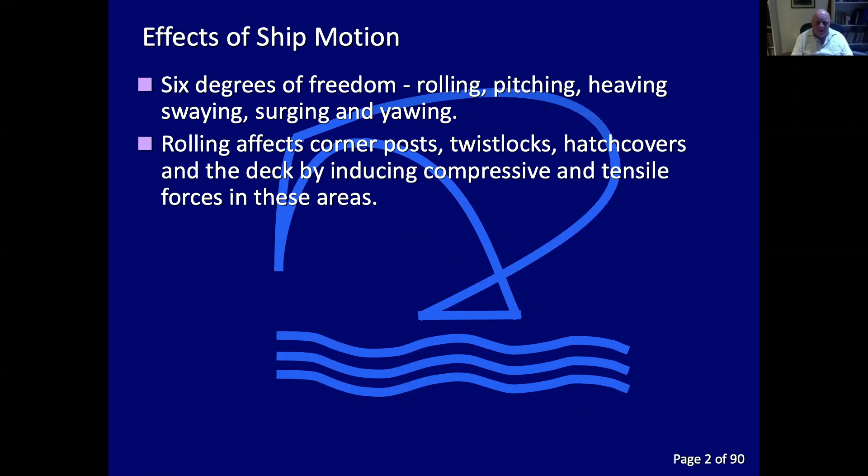Container ships, like all ships, go through ship motions. We have 6 degrees of freedom: rolling, pitching, heaving, swaying, surging, and yawing. All of those have an effect on containers on container ships. Rolling affects container corner posts, twistlocks, hatch covers, and the deck by inducing compressive and tensile forces in those areas. Pitching causes longitudinal racking in the container sides, which may be high at the bow and stern. Heaving is induced by pitching, increasing compressive and tensile forces on corner posts and twistlocks.

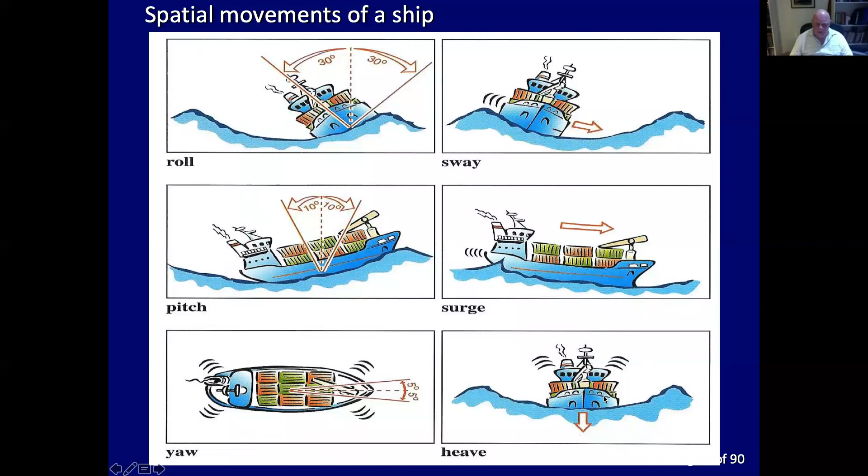So there are 6 motions, you've probably seen that diagram before. We've got rolling, sway - sideways movement if you like, pitch, surge - acceleration and deceleration along the longitudinal direction, yaw - twisting and turning from side to side, and heave - up and down.

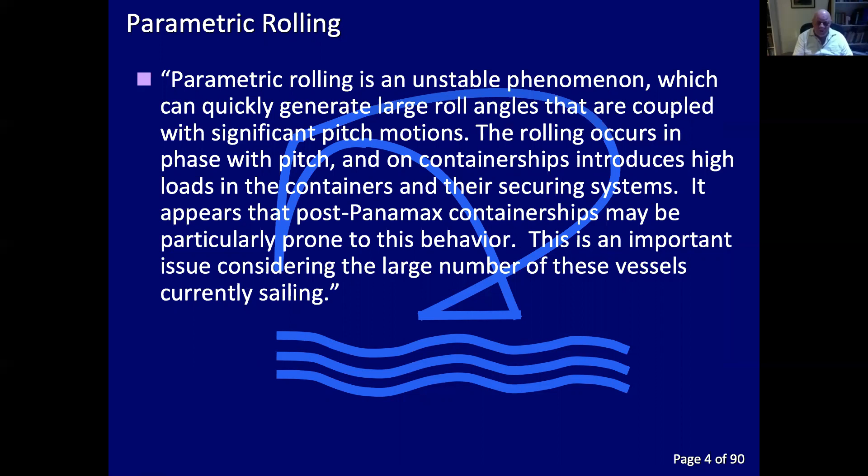One of the problems we've got at sea nowadays is parametric rolling, and it's becoming more prevalent, as are these massive big waves that we're getting. Parametric rolling is an unstable phenomenon which can quickly generate large roll angles coupled with significant pitch motions. The rolling occurs in phase with pitch, and on container ships introduces high loads in the containers and their securing systems. It appears that post-Panamax container ships may be particularly prone to this behavior. It's an important issue considering the large number of these vessels currently sailing. One previous paper showed whole stacks of containers fallen over on the back end of a container ship, and that was because of parametric rolling.

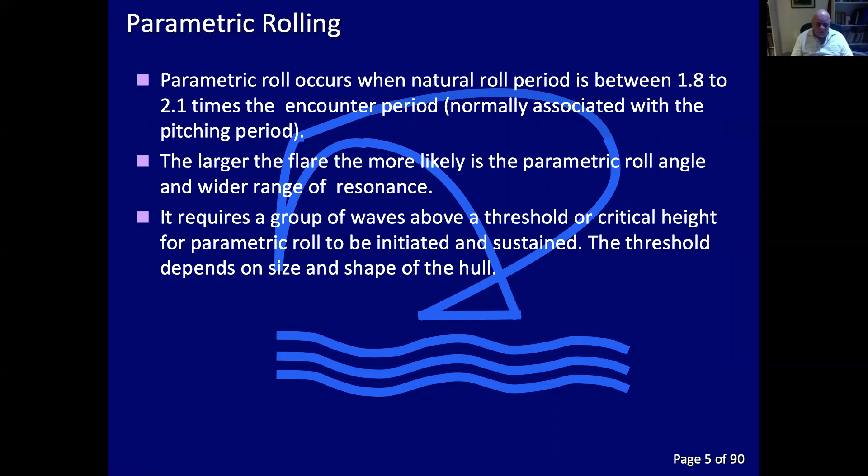Parametric roll occurs when the natural roll period is between 1.8 to 2.1 times the encounter period, normally associated with the pitching period. The larger the flare, the more likely the parametric roll angle and wider the range of resonance. It requires a group of waves above a threshold or critical height for parametric roll to be initiated and sustained. The threshold depends on the size and shape of the hull, bow flare being particularly important.

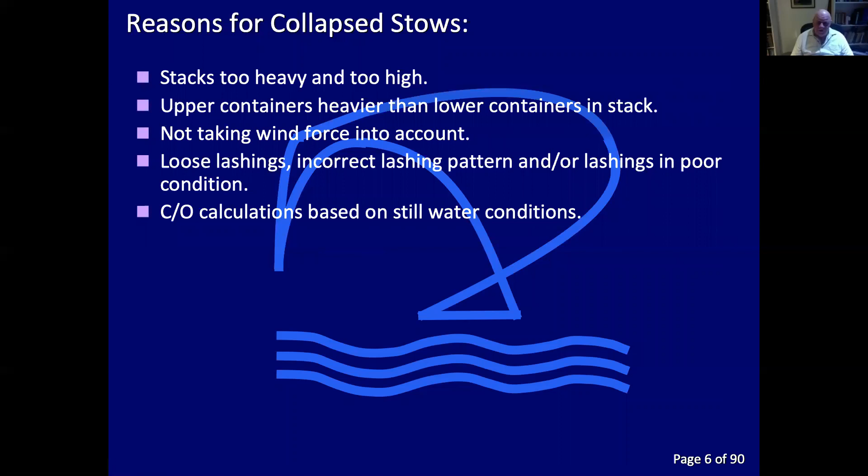Why do container stows collapse? Very often it's because they're too heavy and too high. The upper containers are heavier than the lower containers in a stack - this happens regularly. Not taking wind force into account. Loose lashings, as we've just been talking about. Incorrect lashing pattern and/or lashings in poor condition. And the chief officer's calculations based on still water conditions and not the conditions that the vessel is going to meet.

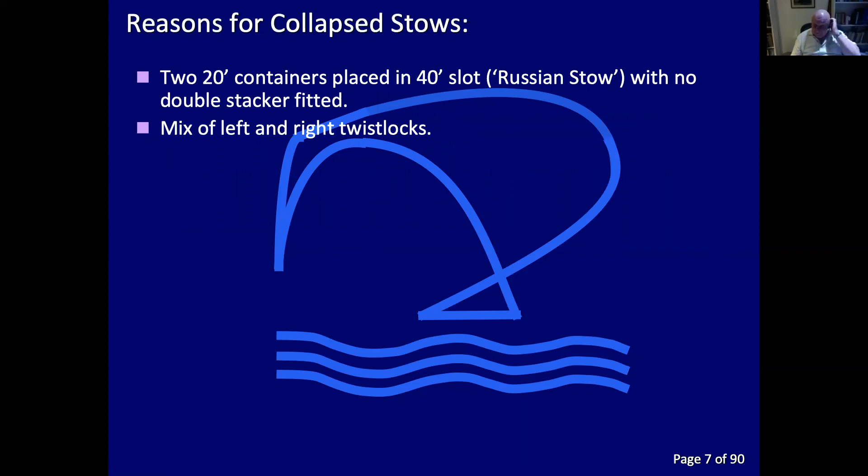Another cause is where there's 2 20-foot containers placed in a 40-foot slot with no double stacker fitted - this is known as a Russian stow. Then you've got a mix of left and right twistlocks, a regular occurrence. Mixing of high cube and standard containers causes misalignment, preventing the fitting of double stacking cones and bridge pieces. So the actual stack is no longer a homogeneous stack - a stow consisting of all high cube containers.

Why does that make a difference? Because the class stowage plan may actually show that she has 6 high standard containers, and if you put 6 high cube containers on there, you're increasing the height of that stack considerably. Then there's the movement of cargo in containers - very often the cargo hasn't been stowed in the container in an appropriate manner, it's not shored or lashed appropriately, so heavy machinery etc. can roll around inside the containers and do damage.

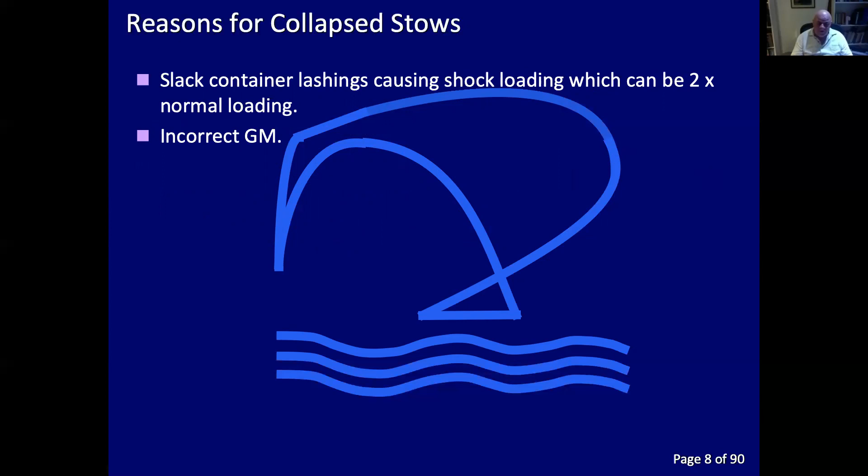Then we've got slack container lashings causing shock loading, which can be 2 times normal loading. Incorrect GM - if the GM is too high and the vessel is stiff, that causes shock loading. So these are the actual forces experienced by the container: transverse racking due to rolling from side to side, longitudinal racking due to pitching, and with heave, compression in the corner posts.

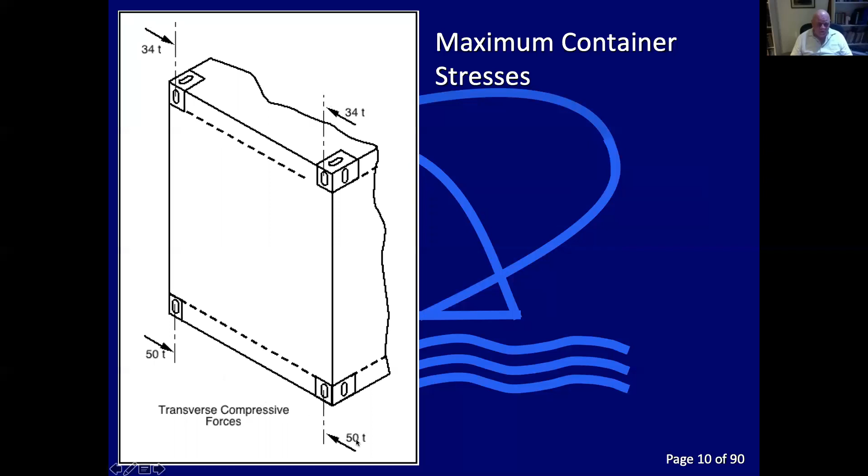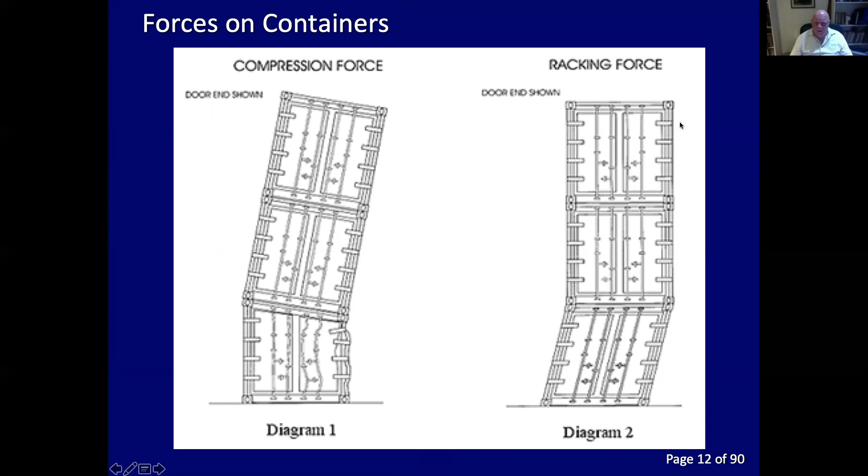These are the sorts of forces you get in containers. This compression force is where the upper containers are too heavy and the vessel has been rolling, and consequently the lower container is crushed. Then we can get racking force, again, where the lower container is racked.

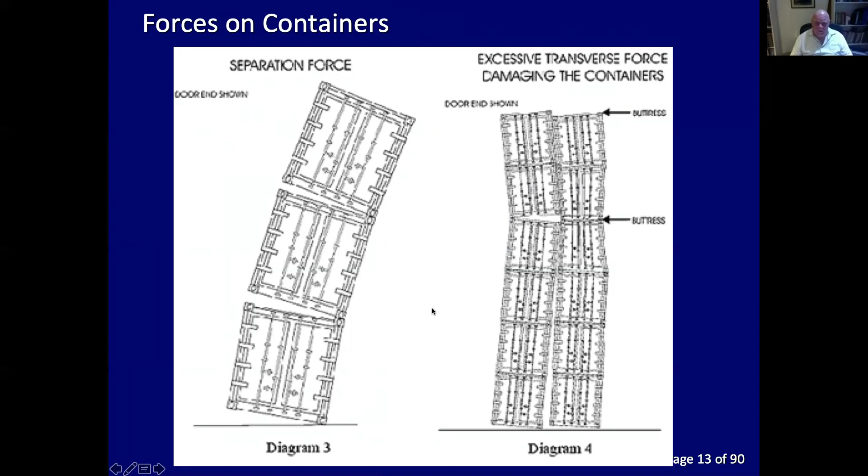Then we've got separation forces, so as the containers roll over, the Twistlocks here and here, and the stacking corner here may give way due to the loads. And in this case, these are the transverse forces where the buttresses have held, but the containers themselves have moved quite significantly due to the motions.

Now, as far as the bays are concerned, the bay numbering is interesting, because remember, you can carry 40-foot containers and you can carry 20-foot containers. In this particular case, the 20-foot containers are 1 and 3, then 5 and 7, 9, 11, 13, 15, and so on. Where there are 40-foot containers stowed, it becomes 2, 6, 10, 14, 18, 22, 24.

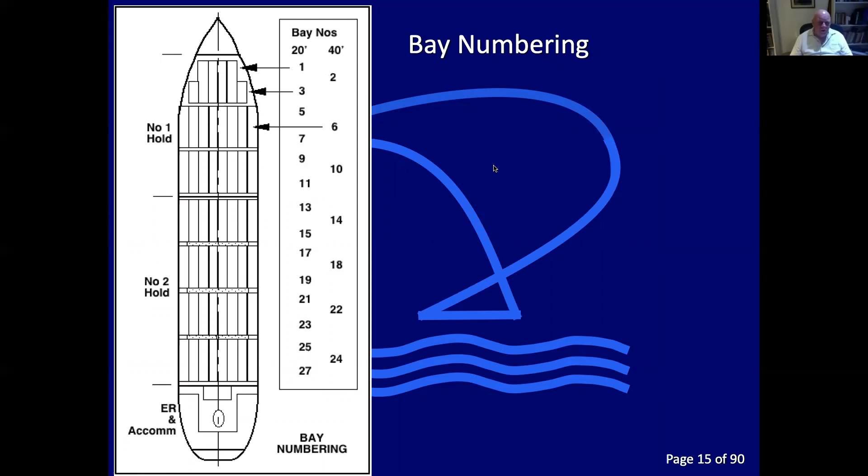So if we look at the actual identification, they're identified by bay number, by tier, and by slot. For example, 268603: 26 will be the bay, 86 will be the tier, and this will be the slot.

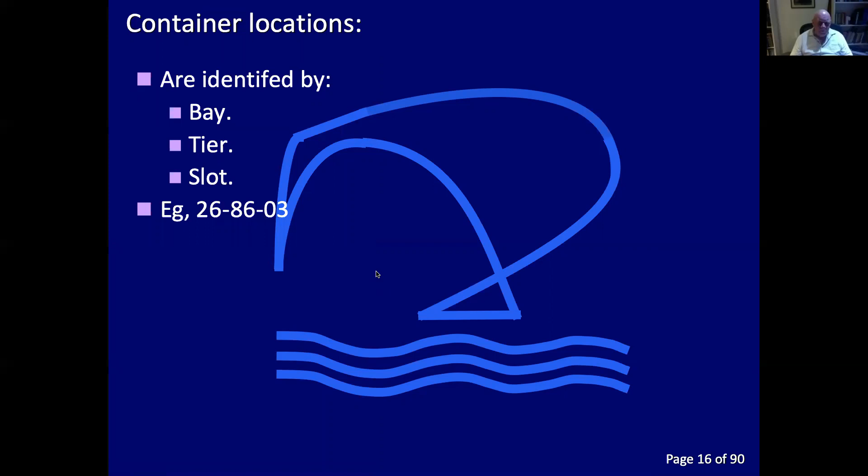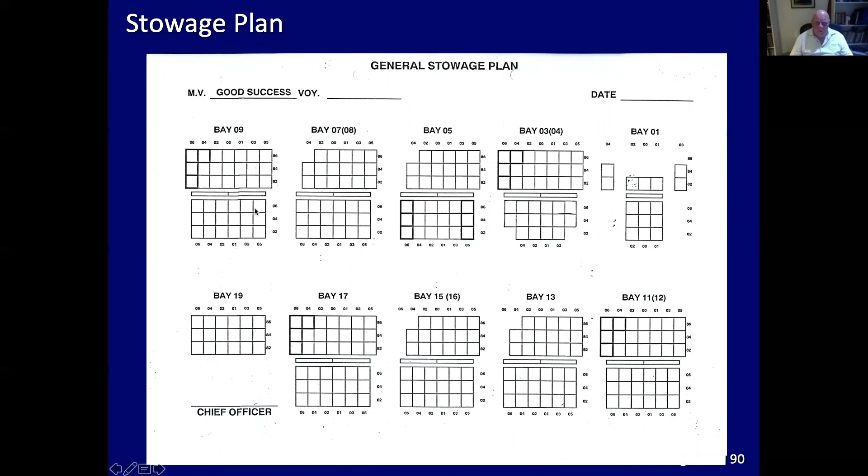Okay, and this is a typical bay plan for that type of ship. You can see it's signed off by the chief officer, and he will probably use a coloured crayon, Crayola pen or something to mark in the different ports for the different slots. This is a typical little coastal feeder vessel operating out of Hong Kong.

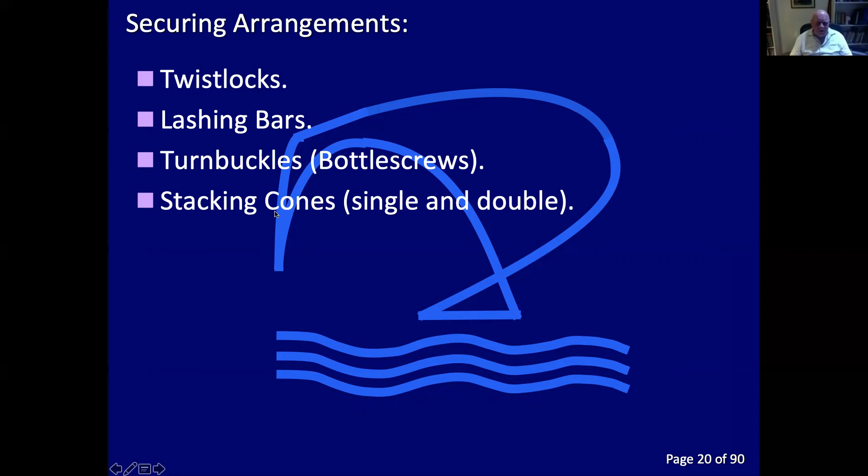So what sort of securing arrangements do we have? Well, we have Twistlocks, we have lashing bars, we have turnbuckles - we'll be looking at these in the pattern later - or known as bottle screws by some. I think turnbuckles is American, we say bottle screws. Stacking cones, single and double. Lashing D-rings on the deck and on the hatch covers. Shoes for the base Twistlocks. Bridge fittings to tie them together at the top. And buttresses that tie them to the side of the hold. And then various other mooring points around the hull.

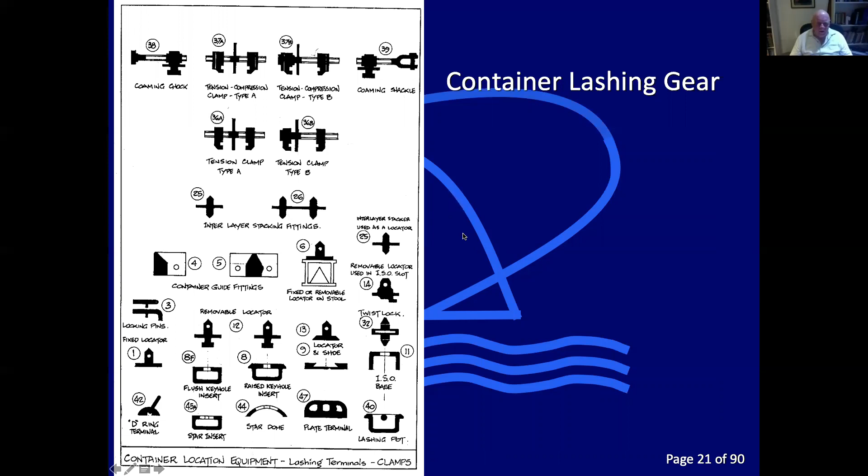And these are some of the fittings you'll find. You'll see them on board the ship. These are the bridge pieces that we were talking about, which slot across between containers. Same here. Then these are the stacking cones, a single and a double, etc. Okay, you'll get this presentation later, so you'll be able to see these in more detail. Then, of course, you've got the bottom foundation fitting.

So these are what you'll find around the deck and the hatch cover to hold the containers down or in position on the deck or on the hatch cover. These are the D-rings, cone pieces and Twistlocks. And we'll talk about Twistlocks a little bit further later.

Then again, we have between the actual containers, various types, and on the deck as well - stacking fittings, and again, bridge pieces.

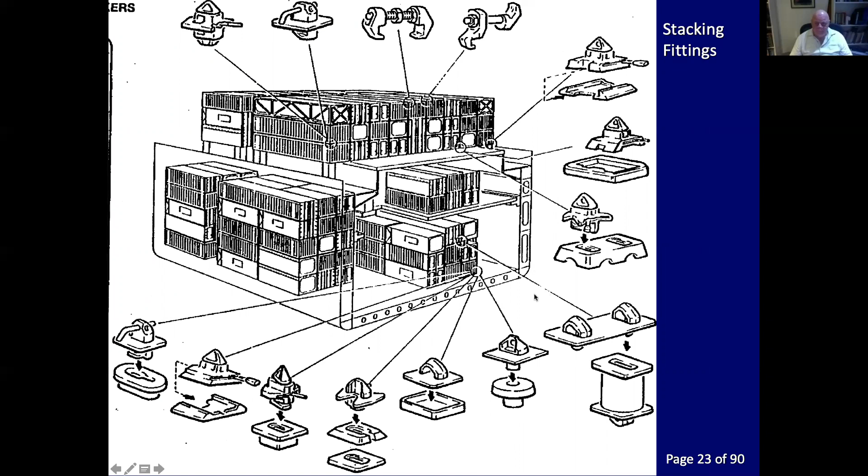Okay, moving on. This is a standard type of lashing, now this is on a vessel which is obviously not a dedicated container ship. The problem we had going back some years was that many general cargo ships had been converted to carry containers, and these were the vessels where we had most of the problems.

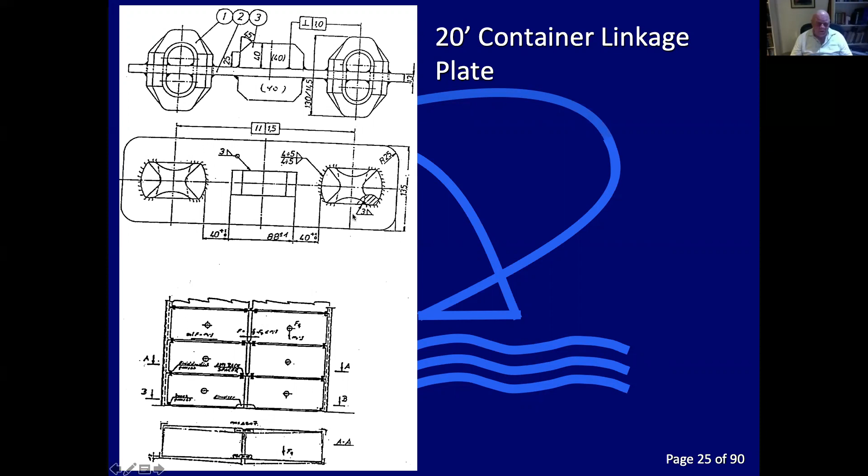This is the linkage plate, the double linkage plate I was telling you about. So if you're putting two 20-foot containers together, you must put this between the two containers in these positions here. We're talking about the vessels that had been converted over to carry containers, general cargo vessels.

So what would happen is they would have fixed guides at the forward end of the hatch or the after end of the bulkhead, and then in the middle of the hold they'd have temporary or portable guides held in place by stays and wires. This one in the middle here would allow 20-footers to be put into a 40-foot slot. This was another one where we had problems with temporary container stacks and guides.

So this is looking down a container hold showing the cell guides. Here's your cell guides - you've got 1, 2, 3, 4 across here, so this would be 2, 4, 6, 8. And then it would appear you've probably got about 4 high, maybe 5 high.

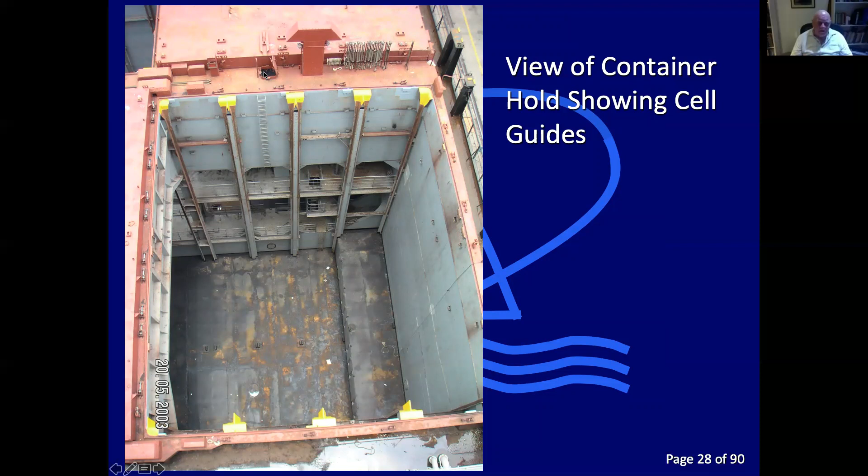You notice the tops are painted yellow - these help the container crane driver locate the containers when he's dropping them in. There's the hold ventilator and access hatch, and you'll see he's got the lashing bars all set up ready for the deck.

And this is a typical feeder vessel in Shekou, Yiu Lian Dockyard. Hatch covers obviously ashore being maintained, painted, repaired, etc.

This one is interesting because you'll see these are 40-foot container holds, but halfway down you've got these hinged cell guides which will roll out in this direction, so you can put 20-foot containers in these two rows here, 2 stacks here, and the same in this hold.

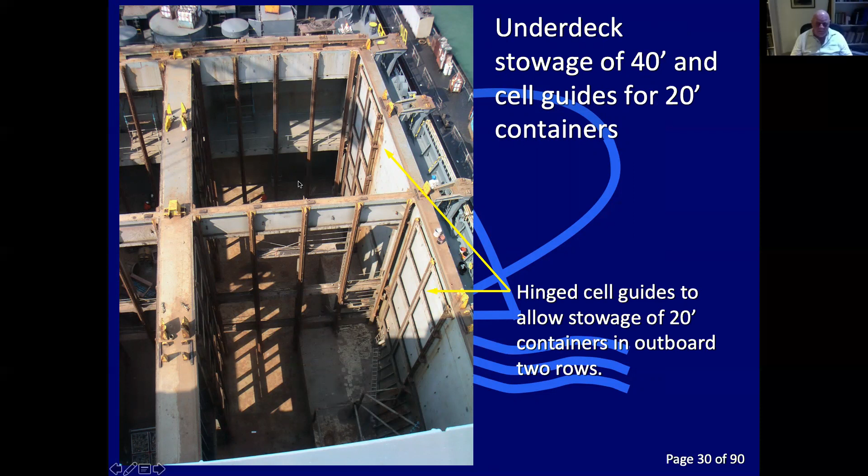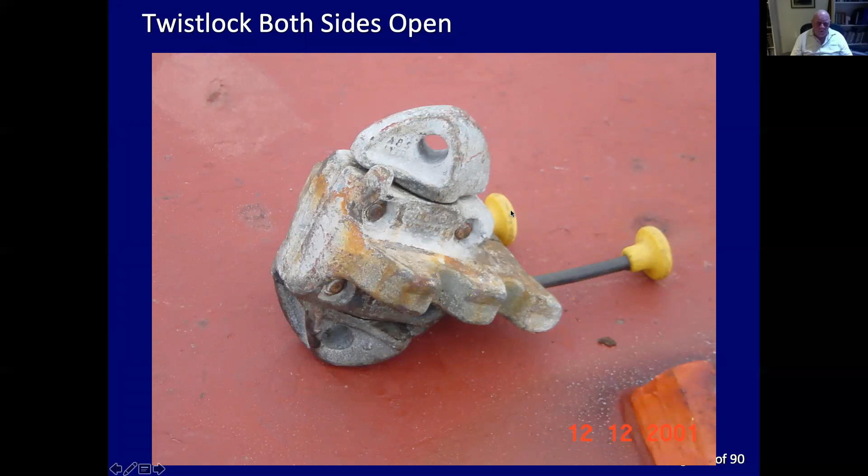Now, very easy to confuse these. So there you see the right-hand twist lock in the open position. And this is a twist lock with both sides open. These are actually operated by a claw on the end of a pole very often to lock them, and it's being pulled the other direction - you see it's now locked. This will lock automatically when it's dropped into a slot.

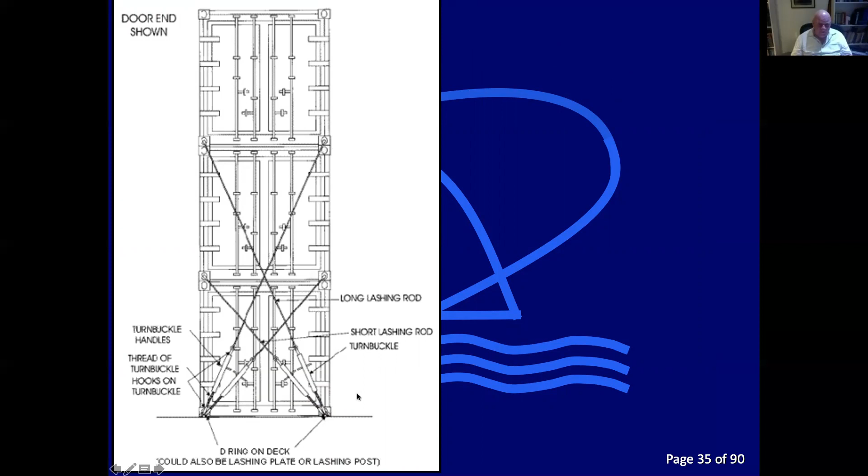And then you have lashing rods again from the bottom of the second tier container, crossing over here - and that is the correct way. Of course, you've got twist locks in between these containers, and then cone pieces here locating the containers on the deck. Okay, that's the correct way to lash them.

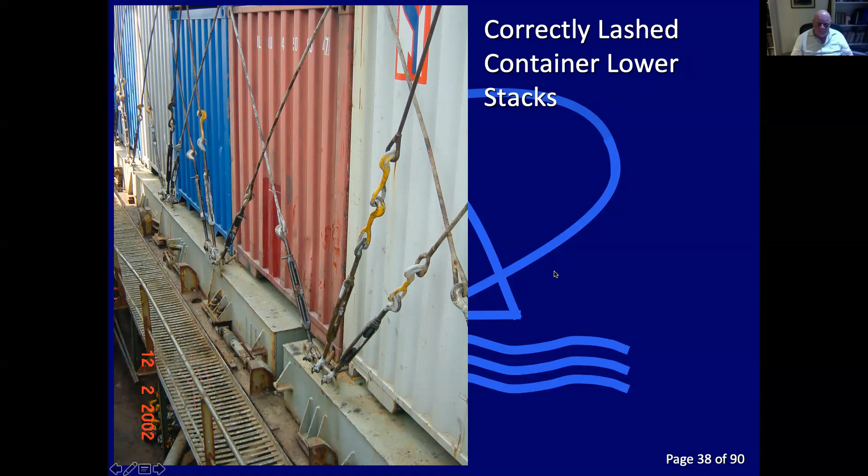Okay, and you see the access grating here. These are supposed to be, if you're doing a survey on a container ship, readily accessible, and also with handrails to prevent the people doing the cargo stowage from falling over the side - so safety for the crew and the stevedores.

These are what we call penguin hooks. This is how you actually locate a lashing bar into a corner casting, and you'll see they've got the pulls here for twisting them into position. I'm sorry the photographs are so old, but I haven't been on one for a while, but there we are.

Anyway, these are well-maintained bottle screws, but at the same time they're actually screwed down to almost their full extent. What should happen is that they should only be screwed into about this depth here, to give you the adjustment during the voyage to maintain the tension in the lashing bars.

You see there's a locking nut here. So once they've been tensioned, the locking nut is applied here to stop them from unscrewing. Nice D-ring, there's nothing wrong, shackles okay.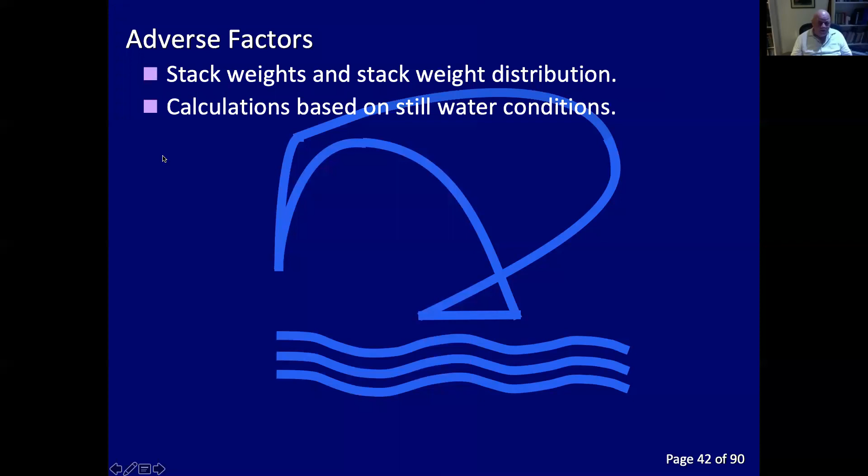So what adverse factors? We talked about the causes before. Stack weights and weight distribution have got to be appropriate, but calculations have been carried out on still water conditions, not the actual weather conditions the vessel's going to be experiencing. Adequate strength of the hatch cover - can the hatch covers actually take the weight of the containers? Slack container lashings, causing shock loading, which can be 2 times normal loading.

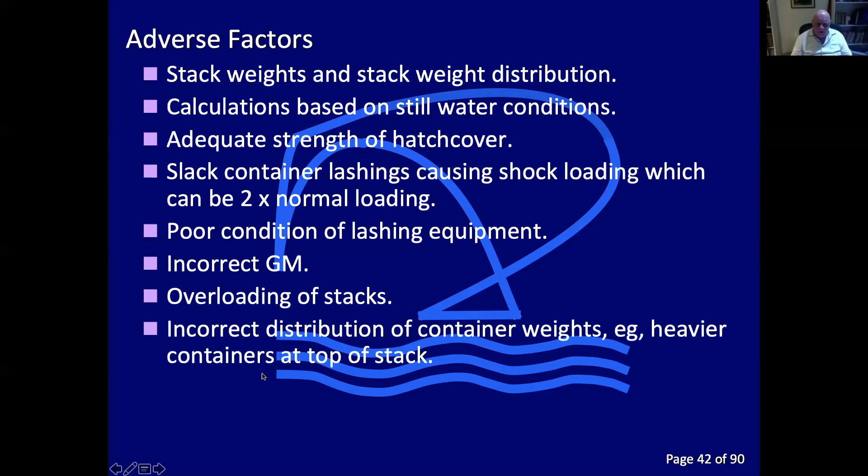We've mentioned this before - key one, poor condition of lashing equipment, not correctly maintained. Usually the container lashings are actually galvanized to prevent them from corroding, but because they get damaged occasionally, they start to corrode. And then of course we mentioned the incorrect GM before, and overloading of stacks, and then the incorrect distribution of container weights.

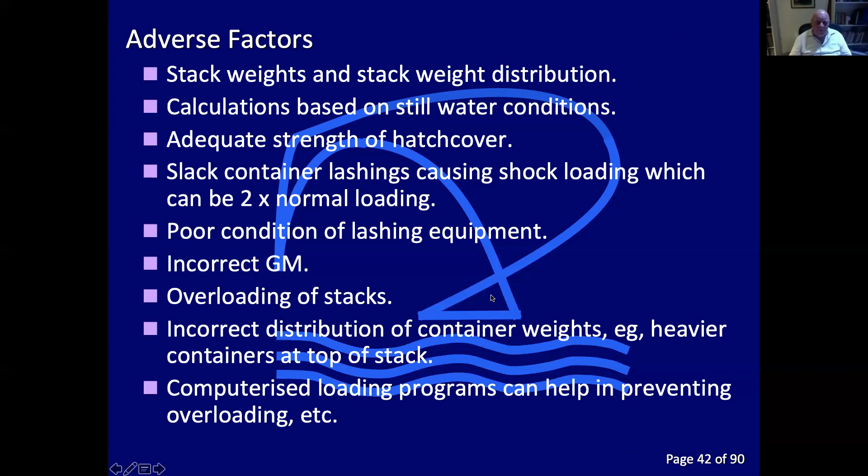Computerized loading programs can help in preventing overloading etc. In Hong Kong, at HIT, they had a program that showed the actual containers being moved from the quay across onto the ship. You could see the weights etc, they were all recorded so they knew which weights were going where. They never lost a container and never had a problem in all the years, I think it was 29 years.

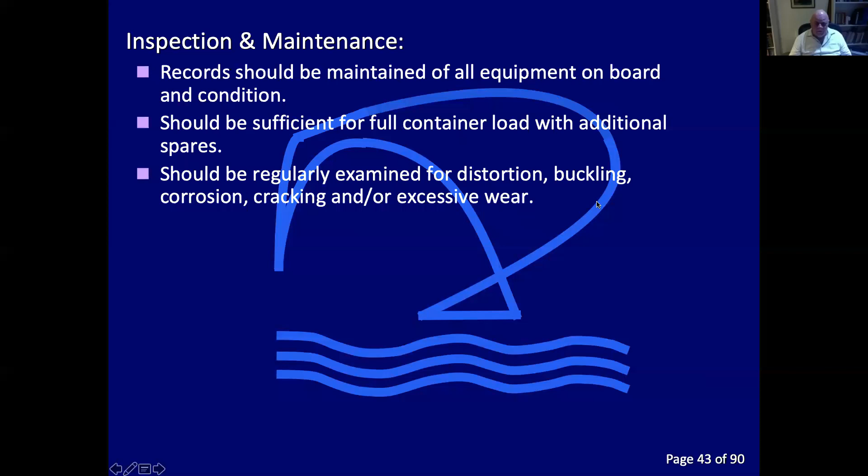Records should be maintained of all equipment on board and its condition. The chief officer should be keeping a lashing gear record logbook. There should be sufficient on board for the full container load, with additional spares because of possible damage or loss. They should be regularly examined for distortion, buckling, corrosion, cracking, or excessive wear.

Turnbuckles, twist locks, and bridge pieces to be regularly lubricated and the twist lock springs to be checked. All fixed fittings to be examined, particularly D-rings, and a file of certificates of approval retained on board. The class certificate, class surveyor, and possibly P&I surveyor will ask to see those. Any suspect fittings to be immediately replaced.

That's why you have the spares on board, and we mentioned the reasons. We said this already, we've done this. Yes, we mentioned this before. Sorry about that, duplication.

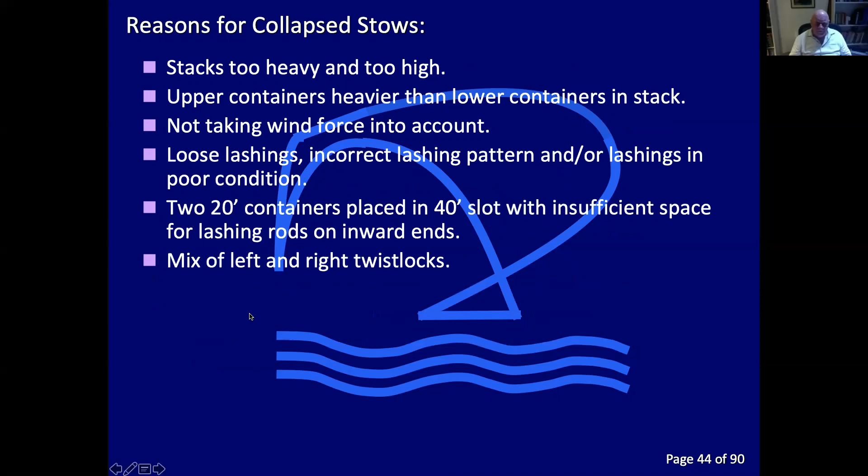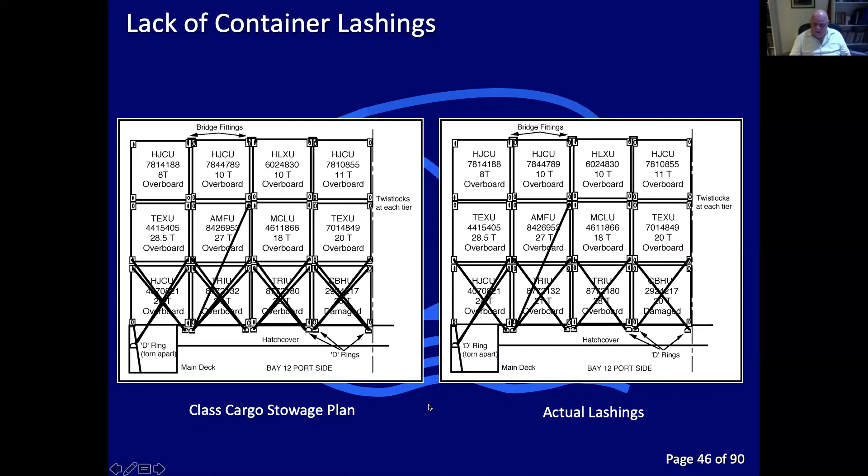This is the actual stow that I found when I came on board. You'll see that there are lashing bars missing to the top of the lower stow, but they have actually done the 2nd tier ones - they thought that was enough. Those are the actual lashings, so there's a deficiency in the lashings there.

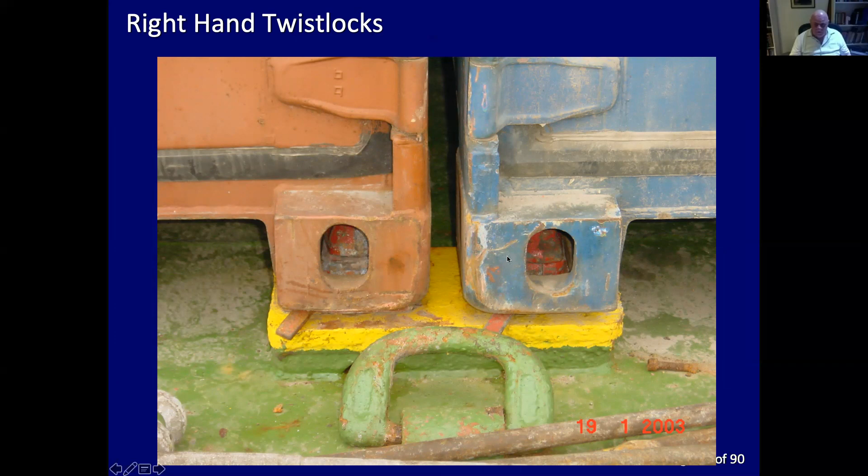They are actually using right-hand twist locks - not a problem, as long as they're all the same, and they are both right-hand there. And then you have a right-hand and a left-hand. Okay, and we're starting now to look at the D-rings as well - they're not looking the best.

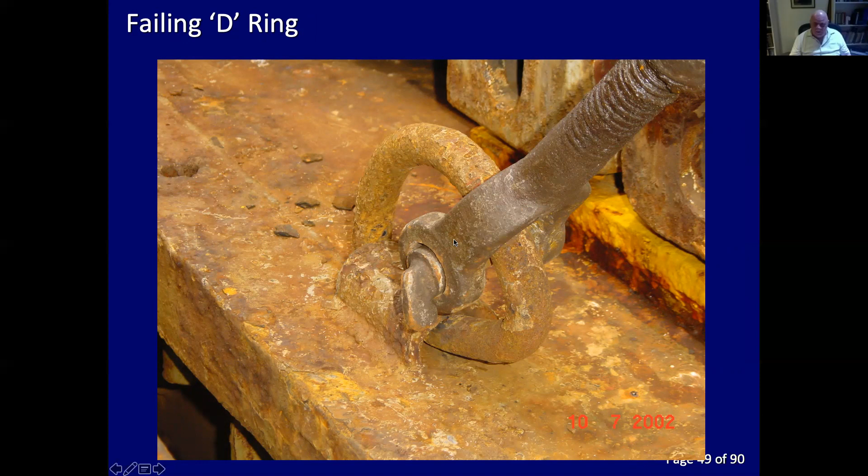You can see this D-ring is starting to become deformed, but the bottle screw is not so bad - it's in place, it's okay, but the D-ring is failing. And then of course you have a D-ring which is turned into a, sorry, go back one - you've got a D-ring that's turned into a C-ring, which has just been torn completely away. And the crew have decided, oh well, we'll just hook it onto the top of that, not a problem.

And there's not even a correct pin in here in the actual lashing there, and there's another one that's turned from a D-ring into a C-ring.

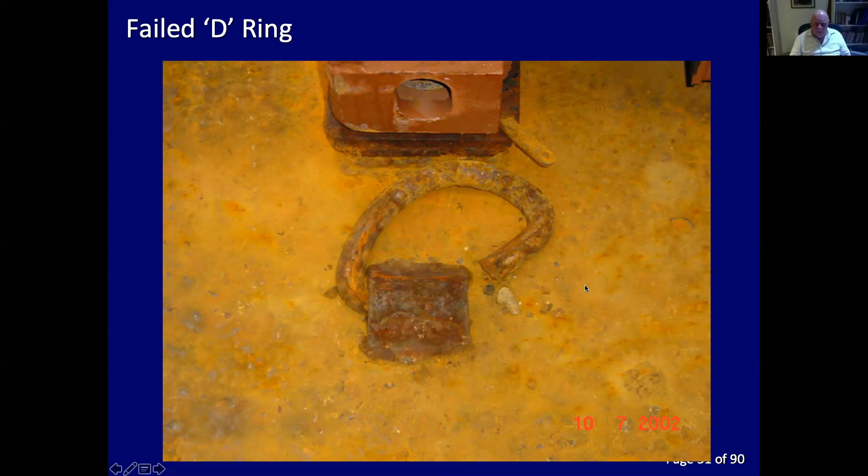Well, I mean, that speaks for itself, doesn't it? Obviously the D-ring's gone, so we'll just make do with this pin instead of the usual fitting here. Speaks for itself, I think, that one.

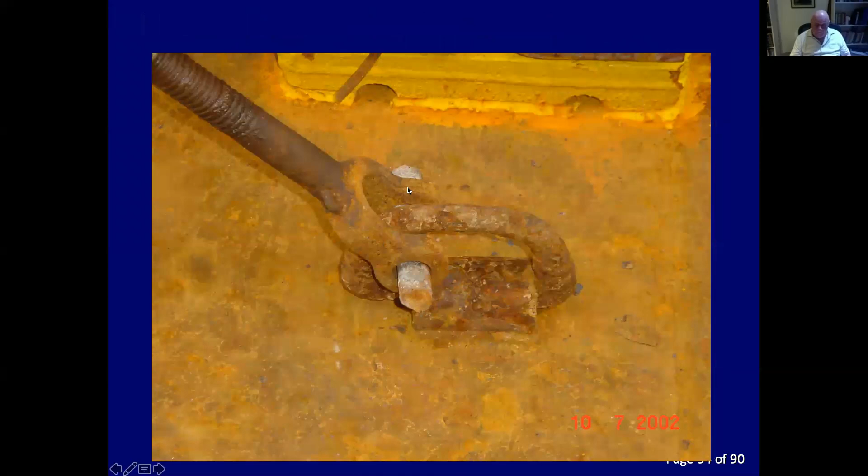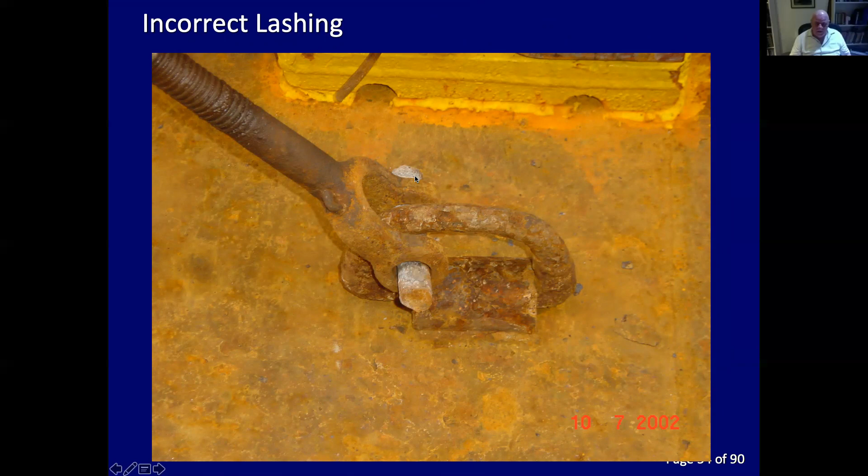So here we go again. Instead of having the correct pin in here, we've got just a piece of bar shoved through. As soon as that starts jumping, that pin is going to drop out. There's going to be no lashing there at all.

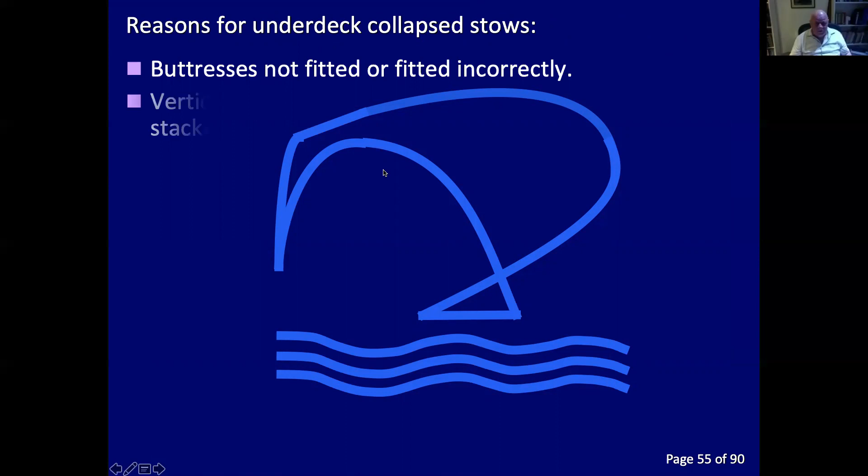So underdeck collapse stows, why do they happen? Buttresses not fitted or fitted incorrectly. Vertical movement between stacks causing double stacking cones to fracture. Adjacent stacks of different types preventing fitting of double stacking cones - this is where we're talking about a mixture of high cubes and standards. Gaps created by empty slots preventing transmission of forces across adjacent stacks to the buttresses.

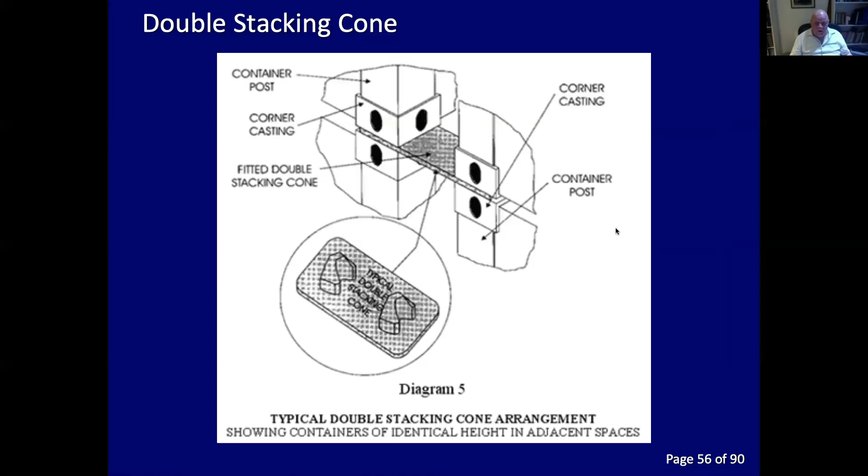And this is the double stacking cone that we just mentioned before, and this is how they should be fitted between two 20 footers - this is the confirmation of it. And if you've got different heights of containers, so you've got a 40, a standard and a 40 high cube, they're not going to align, so you can't actually put the piece in.

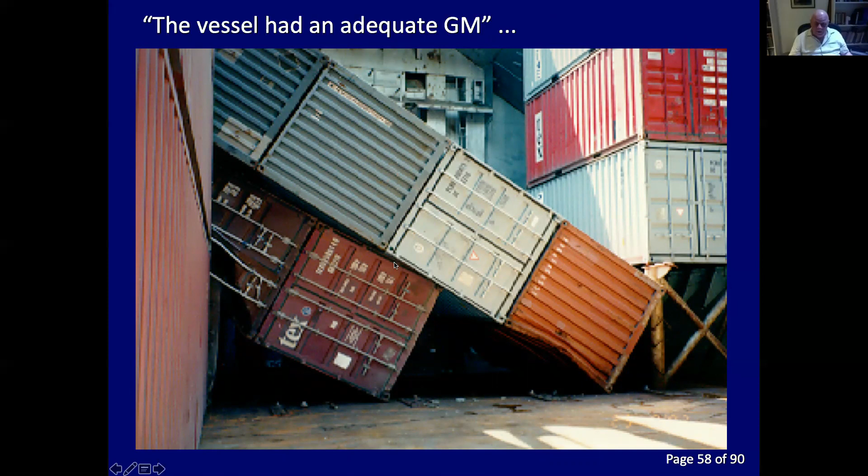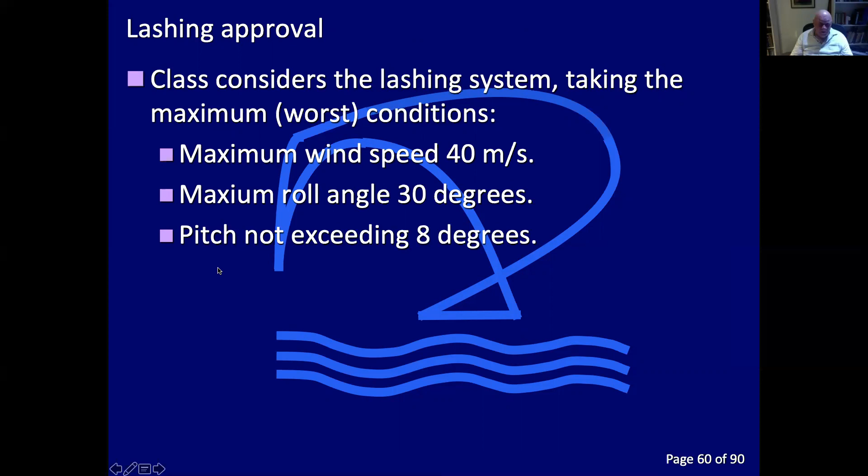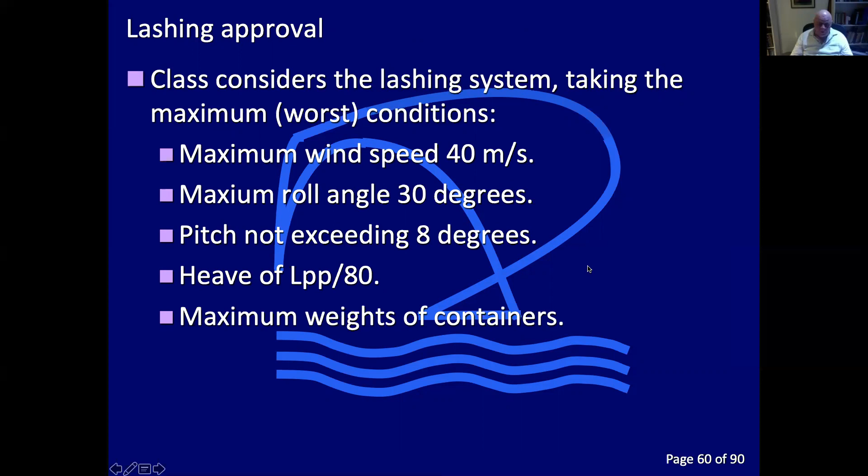What happens is class considers the lashing system taking the maximum or the worst conditions into consideration. That is a maximum wind speed of 40 meters per second, a maximum roll angle of 30 degrees, pitch not exceeding 8 degrees, and a heave of length between perpendiculars divided by 80. And then obviously the maximum weights of containers that would be possible, and also static gravity forces, inertial forces due to roll, pitch and heave motions of the vessel. So this is what they take into account.

Oops, sorry about that. Let's get rid of those. Let's do it again, come on.

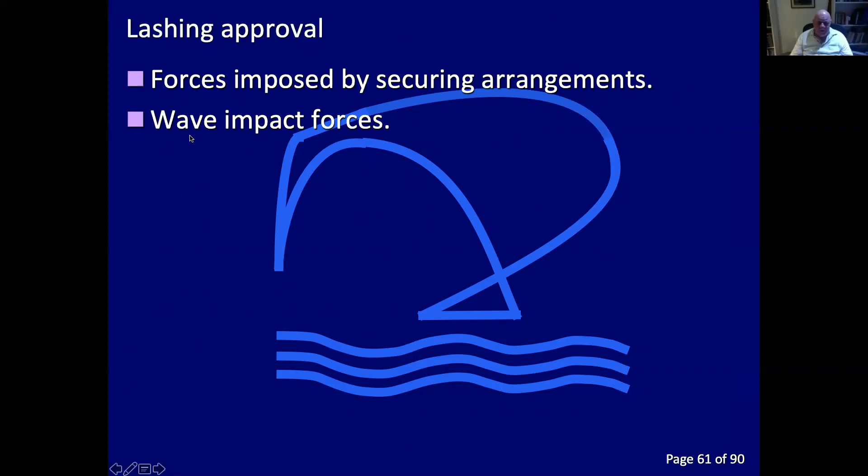There we go. The forces imposed by securing arrangements, they take those into account - the wave impact forces striking the containers, wet, green seas coming over the bow and over the sides.

Calculations are relating to 4 high stacks only, although they've now increased them to 8. This is with containers at the extremities of the vessel, so this would be right up on the bow, number 1, and on the outside of the vessel - bay 1, right on the outside port starboard sides. Or if it's a vessel with containers aft of the accommodation, then it'll be the after ones right on the port starboard side aft extreme.

Oh God, here we go again. Sorry about this. There we go.

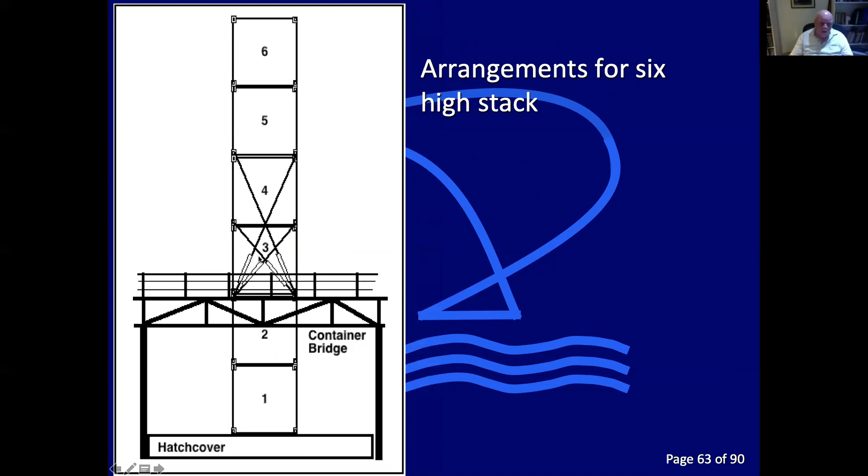So we've looked at this before, let's move on. Now that was for 4 high. Now this is what's happening - of course we're getting container stacks a lot higher now. So what is happening is the ship designers are putting container bridges in so that the bottom 2 containers are basically held down, secured by the top 4, and the calculations are now done for these 4 here.

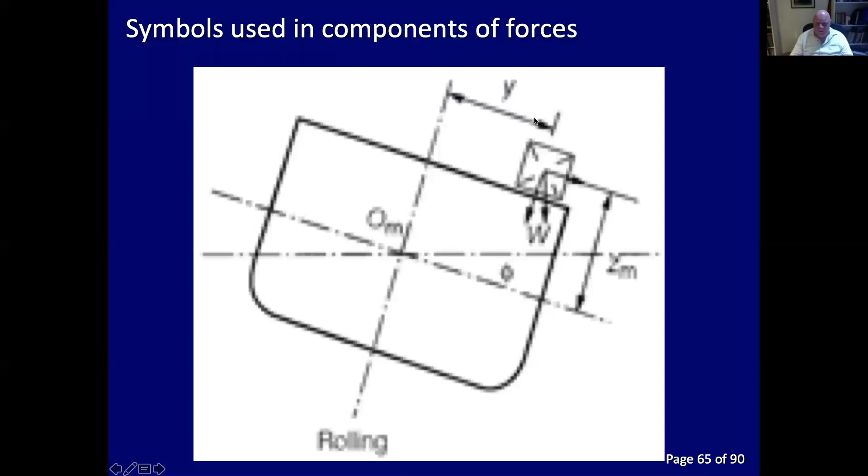Other things to take into consideration: the forces in the forward 0.25L, the quarter length, are increased by 20% to account for wave impact and shipping green seas, unless the containers are adequately protected by a breakwater or similar device.

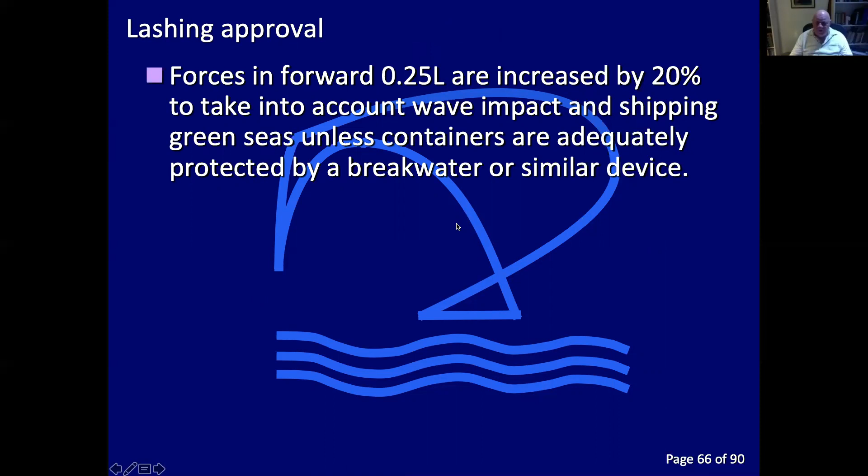The resultant force acting on a container is the vectorial sum of the individual directional components of all forces acting at a given instant. These calculations are based on the most severe combination of the forces.

So if we look at the bottom of motion, this is where the ship has just gone over a wave and is now coming down to the lowest possible point. And she's rolling as well at the same time. So you have a static rolling force, a rolling dynamic force, and a heave force.

And on the bottom, inside the hold, you've got the same thing. So you add these vectors together, and you'll get a net force for the one on deck and one below. The forces here are far more significant than the ones down in the lower hold.

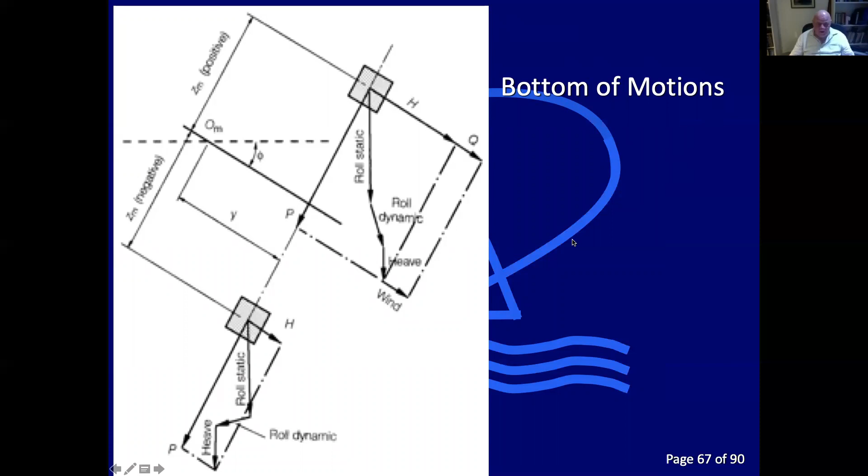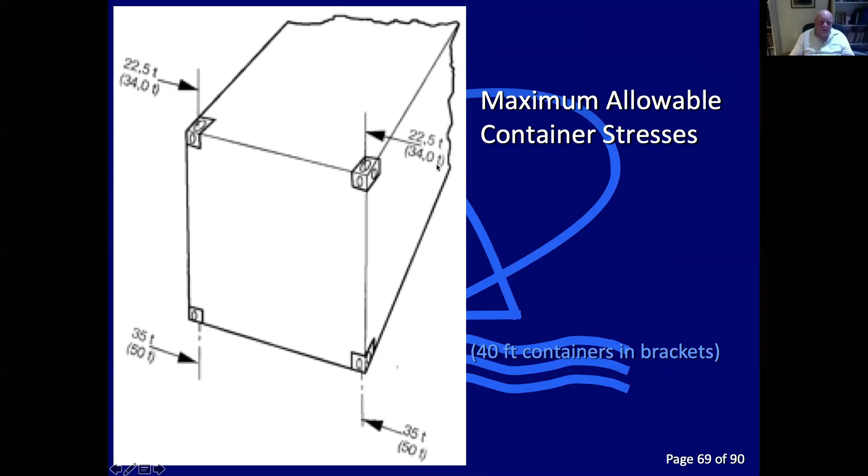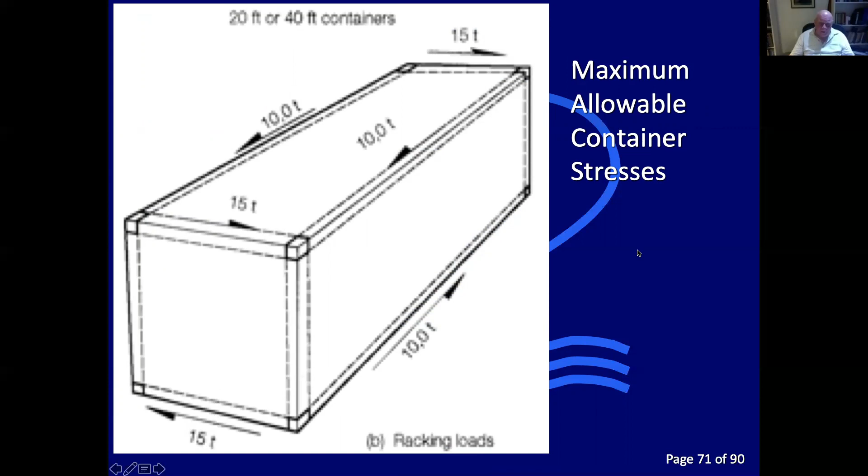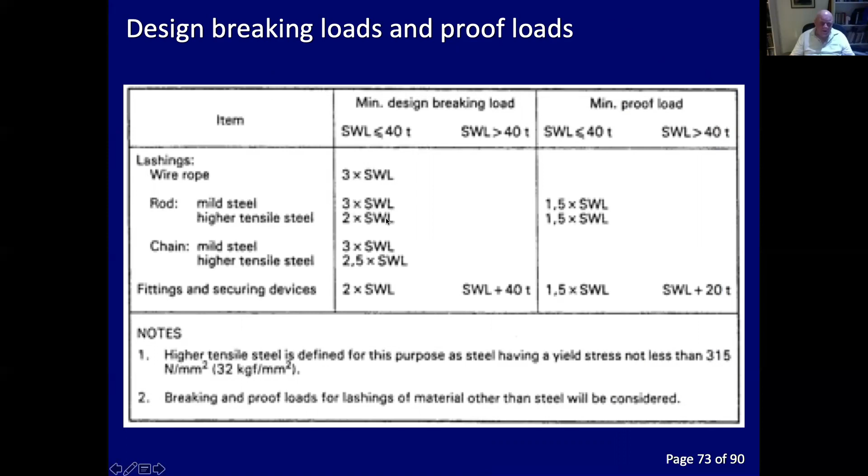So for a rod, a mild steel rod, the minimum is 3 times the safe working load, high tensile steel is 2 times the safe working load, etc. That's taken into consideration.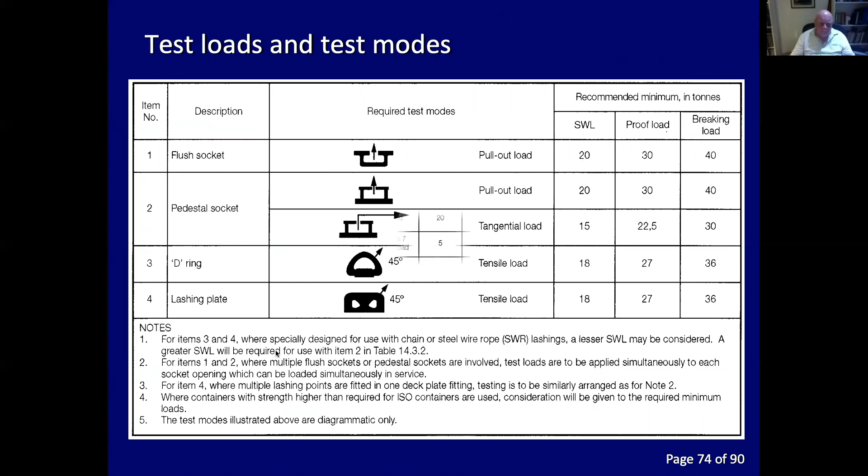Then, each of the actual fittings used have recommended minimums and maximums in tons - safe working loads, proof load, and breaking load for each of those pieces. And then the actual container lashing gear and fittings also have recommended loadings.

And then what we do is use the ship motions for roll, the maximum being 30 degrees. The period in seconds is given as T equals 0.7B divided by the square root of GM. For pitching, the time for pitch is 0.5 times the square root of LPP. And the heave is LPP divided by 80, with the time being 0.5 times the square root of LPP again.

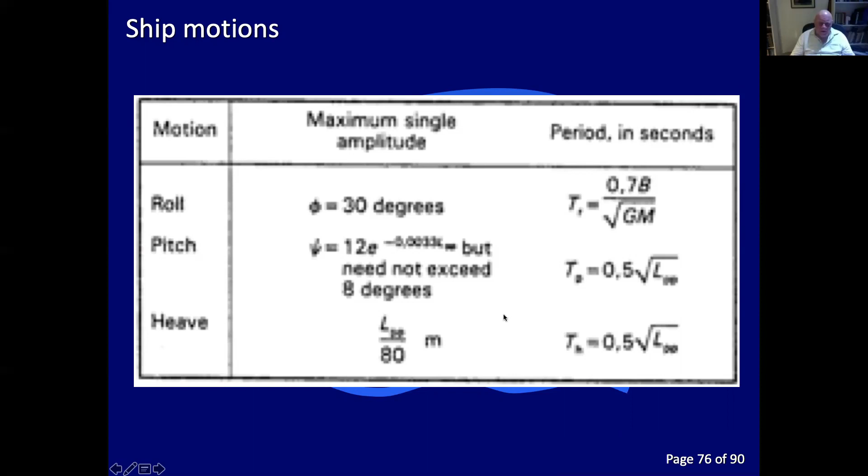And this is where we start to do the calculations - I'll go back one. You can see they start to get quite involved, and if you've got to do those over and over again, it's going to be a real pain in the backside.

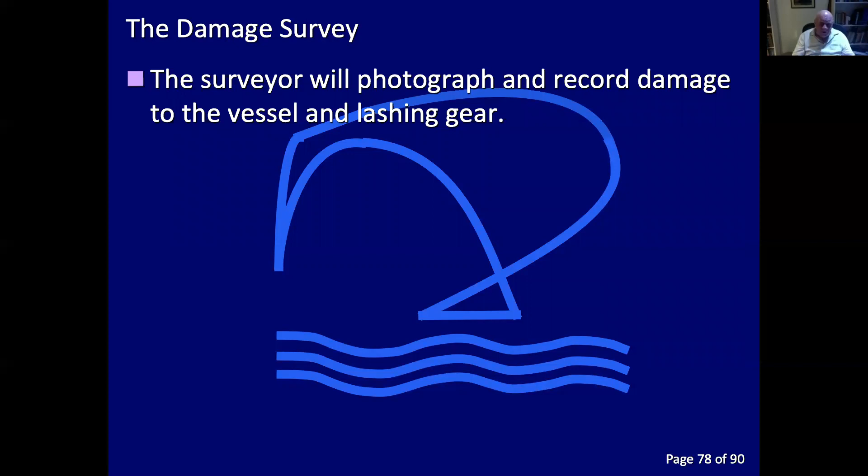So let's move on to what the surveyor is going to be doing. The surveyor will photograph and record damage to the vessel and the lashing gear. This is just the damage surveyor.

But the actual consultant who's going to be doing the calculations to work out the stresses is going to retain damaged lashing equipment for metallurgical testing for latent defect and load testing later, to prove what's happened when they've done the calculations. They then inspect the containers and the contents to ensure the contents were adequately lashed and shored to prevent movement.

And they detail the damage to the container contents. They list it. And get a statement of facts from the officers.

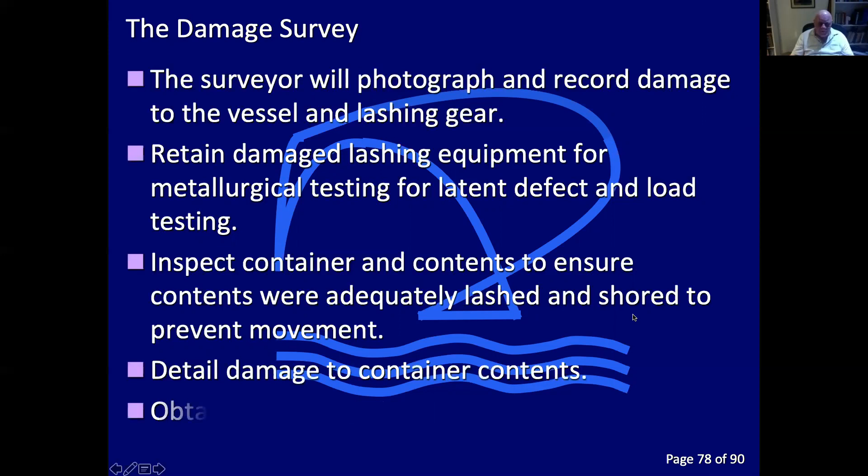Okay, so we're now going to do the calculations. As we said, the surveyor will photograph and record the damage.

Retain damage lashing equipment for metallurgical testing, and get information on all containers involved. The previous surveyor was the damage surveyor; this surveyor is going to be doing the calculations. So you get all the information on all the containers involved - what their dimensions are, are they standard, are they 40s, 20s, 45s, the weight, what the total weight is, the slot that they're in, and the lashings.

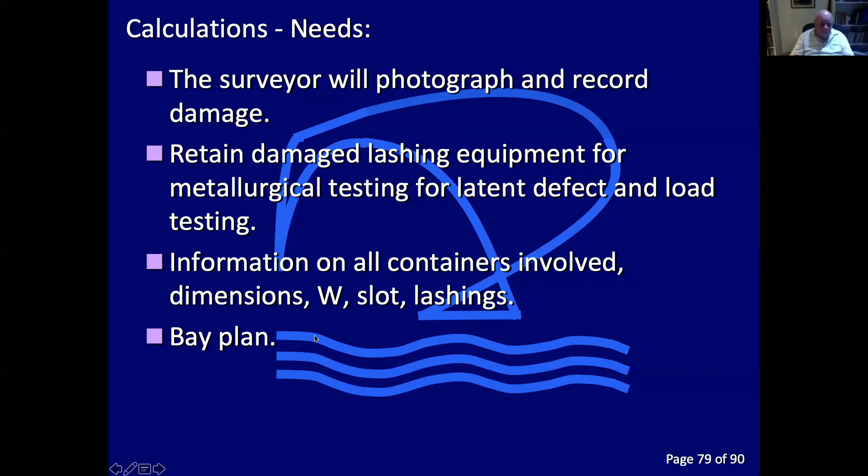A bay plan to show where they are, and the vessel's general arrangement, capacity plan, and midship sections. So there it is, there we go.

Then what we've done, or what I did going back many years ago and used many times, is I took the Lloyd's Register calculations and transposed these into a spreadsheet. And then, instead of inputting the worst case scenario, I input the actual conditions.

So I did many container damage surveys in Hong Kong, vessels coming in from various ports around Southeast Asia, with stows and stacks and what have you collapsed and over. And the P&I clubs were getting pretty concerned about it, so they asked me to have a look at it.

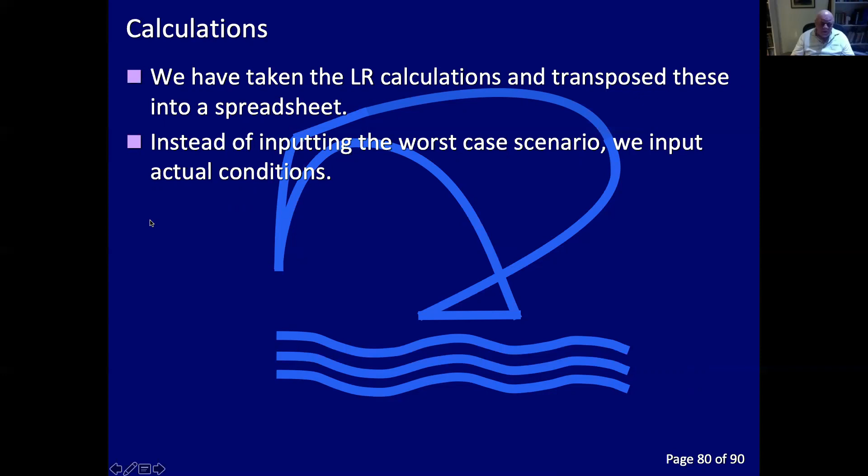And what we then do, instead of putting the maximum conditions that Lloyd's Register use, is put in the actual wind speed based on the Beaufort scale, the actual roll angle as reported by the officers, the estimated pitch, the estimated heave, the actual weights of the containers, and the actual distance of the container from the LCF and VCG. This will affect the moments acting on those containers.

So just going back here - the further you are from the LCF, as we said, if you're up at the front of the bow, then you're going to get more forces, higher forces on it. And of course, the higher you are from the VCG, you're going to get higher forces.

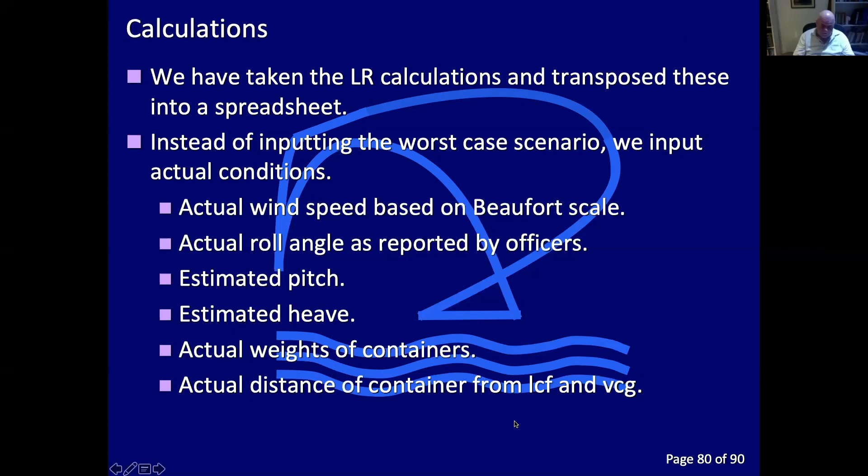So then we get the vessel's particulars, load port stability calculations - we're getting the chief officer's calculations here. And then a statement of facts, including the weather conditions experienced. Of course, we can always back that up and prove that was the case by obtaining a synoptic weather report.

If necessary, we interview the bridge officers, because they can then confirm roll angles, roll periods and things like that. The vessel's general arrangement, capacity plan, and midship sections.

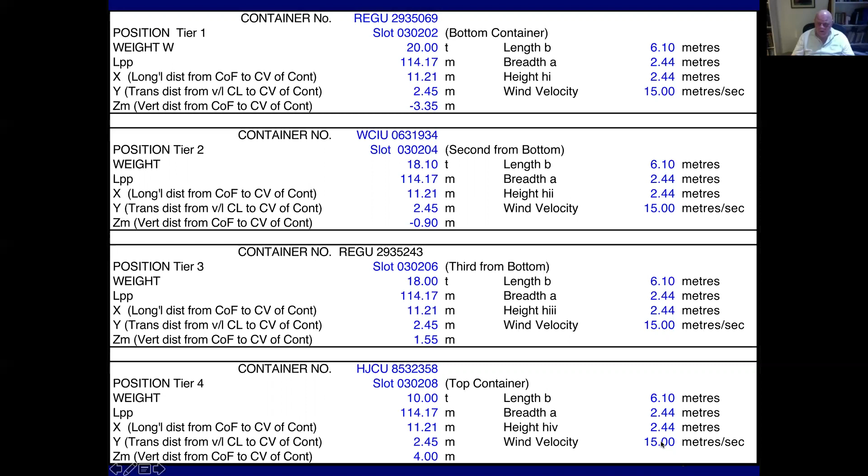Then we also put the container dimensions in. This is obviously a 20-footer - breadth 2.4, 8 feet, 8 feet, and the wind velocity 15 metres per second. So they're all 20-footers. That information gets put in, and then what happens is we get the output.

You can prove crew negligence, for example, poor stability and lack of maintenance. So the poor stability obviously is a stiff vessel because they haven't emptied the double bottom tanks. And lack of maintenance, the actual lashing gear is in poor condition, so it fails. Proving inadequate lashings as a contributing factor, so they haven't put enough in, as we saw before with that small coastal feeder.

Proving poor stowage as a contributory factor, and proving that weather conditions were not contributory. So because we put the actual weather conditions in, if that spreadsheet, those results that come out don't show any loads being exceeded, then clearly the weather conditions were not the problem.

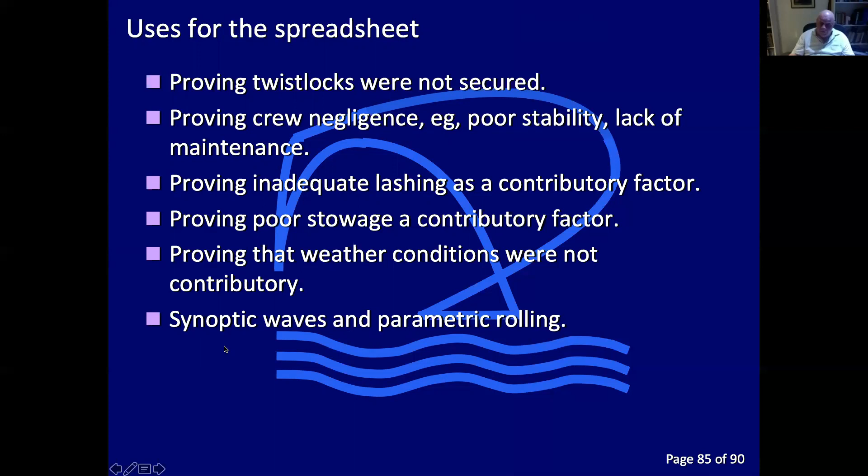And then, of course, synoptic waves and parametric rolling, we can then show that that has had a serious effect. And of course, carrying out what-if analysis - so we can vary certain inputs into the spreadsheet and see what happens.

So, marine surveyors and consultants need to be innovative. And I know several surveyors at the moment who are looking at different aspects of surveying and trying to find new ways, innovative ways, and software which will do the job automatically or more easily for them.

The information is out there for us to use. It's there in the public domain. So just like me, I use the information from the classification societies. I have no qualms about that because they're in the public domain. So I've got no qualms about using their information.

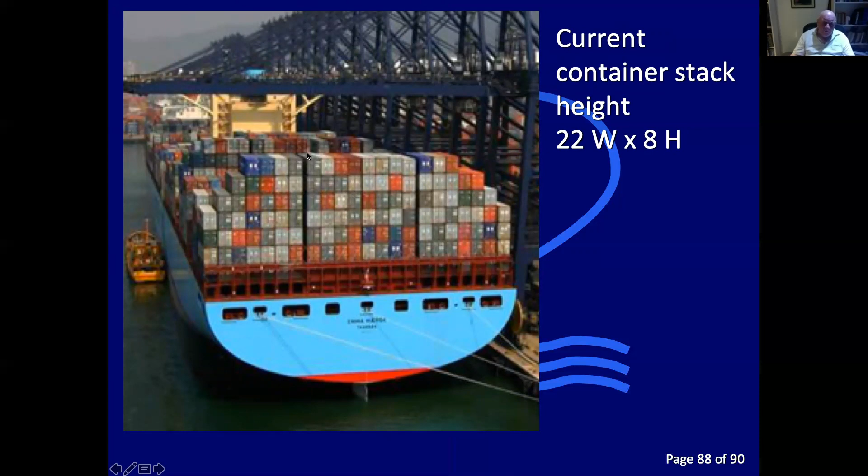So I think that's me. So as you can see from what I've shown you, necessity may be the mother of invention, but an engineer is usually the father. Thank you.